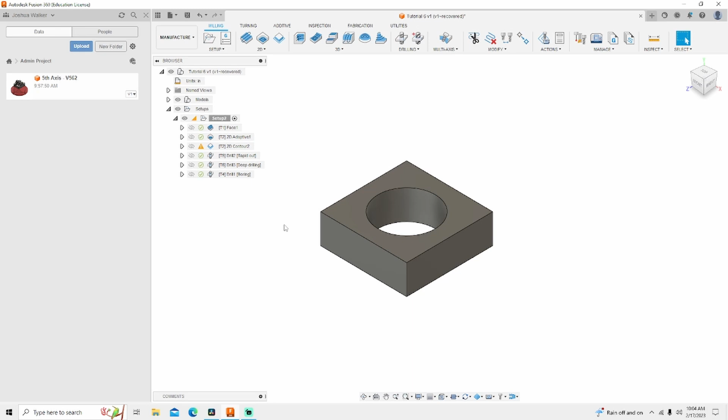First thing we need to do is figure out how big our stock actually is. If you don't know and you're working on somebody else's drawing, you can right click on the setup, go to edit, work your way over to stock, and you see this stock is 3.1 by 3.1 by 1.35. And they have elected to leave 10 thousandths on top of the stock.

Now, I know from personal experience, this is not a correct stock size. You're not going to call the material supplier and say, hey, I need 3.1 inches of stock. They're going to say, we don't have that. A nominal stock size would be 3.25 inches all the way around. And again, 1.35 inches is not a standard stock size.

So we're also going to change that as well, to 1.25. A 10 thousandths face pass is okay, but I'm going to change it to 20. That's what I prefer. And again, this is done by model position Z+. That's going to give us our 20 thousandths.

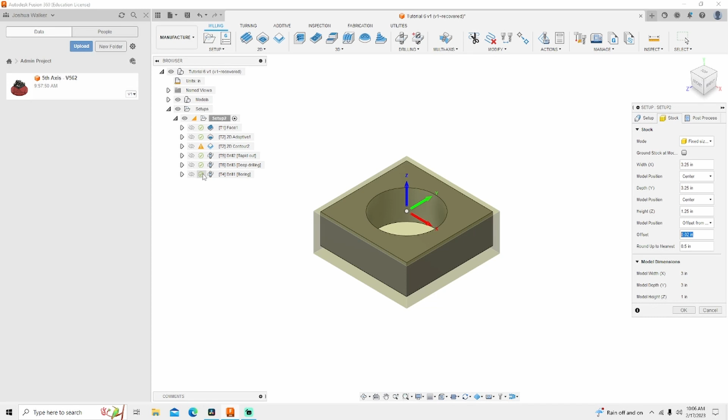Now I want you to see when I click OK, these check marks are going to turn orange because we have changed the model. There's nothing wrong with this. We didn't add enough material to really hurt anything. So we're going to right click and we're going to regenerate.

I wish it said regenerate rather than generate, but this is Fusion's terminology. Once you click generate, it's going to walk back through all the processes. This process right here, you'll see there's a yellow triangle. It's telling you safe distance is higher than the feed height. That's fine. Then it's going to tell you toolpath safe distance is higher than the feed height. Again, that's fine, it's not going to hurt anything.

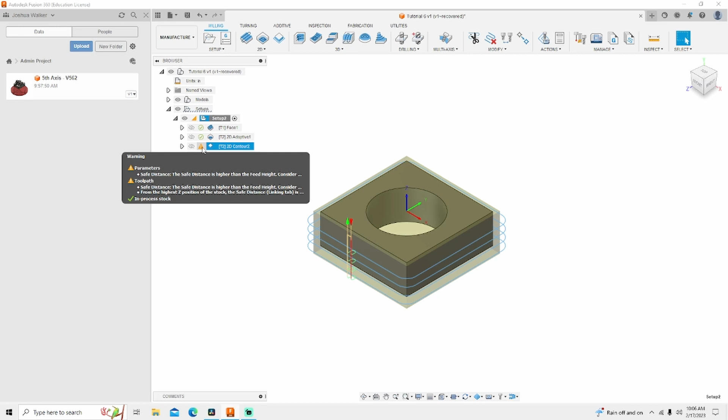Next thing we do is we need to actually model this, because once you go back into design, your material goes away. The way I like to do this is just create a sketch right on top of the part. This part is pretty simple, it's just a square, so we'll create a square.

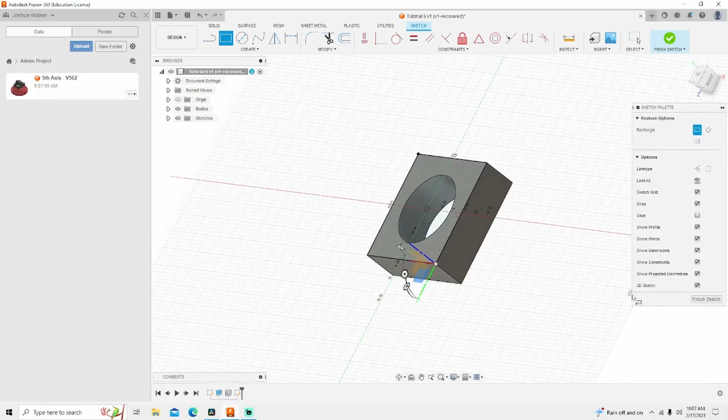Here's our 2-point rectangle, corner to corner. Rotate this around, click on Finish Sketch. Once we've done that, we can extrude a part. Click on that surface, make sure you click on both features. See how one selects the face, the other one selects the whole area.

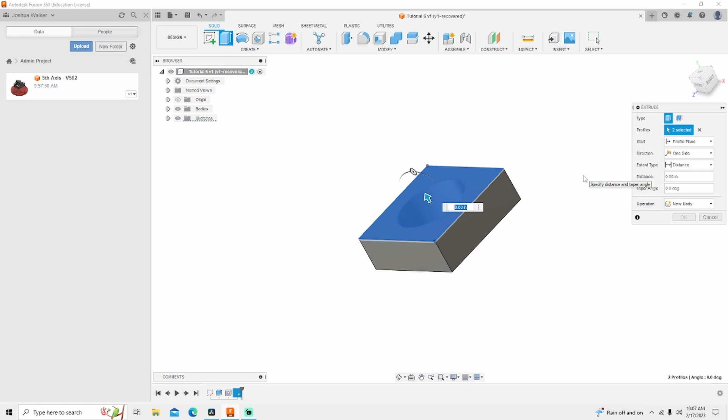Now, keep in mind, we've got 20 thousandths worth of material on top of the part, so we need to extrude in two different directions. We need to extrude up 0.02, and we need to extrude down 1.25 minus 0.02. I could have done the math, but honestly and truly, I'm just lazy, and I'm going to let this box do the work for me. Anything you type into this box is a fully functioning calculator.

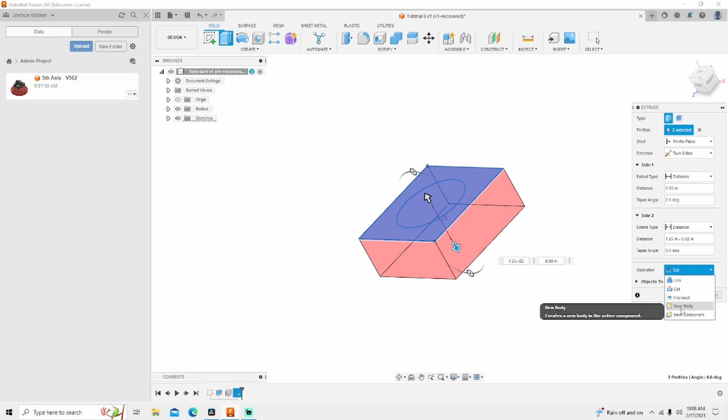Once we've done that, we'll go to our operations. We don't want to cut it, because it's going to make our model completely go away. We want to create a new body. This new body represents our stock. So we click on New Body, you see the body's there, and we can now click OK. And now we know the exact size of our stock that we're dealing with.

Except one thing, I made the square to the size of the part, not the size of our stock. I did the correct height size, I did not do the correct width size. This is somewhat intentional, to show you how to make this option change.

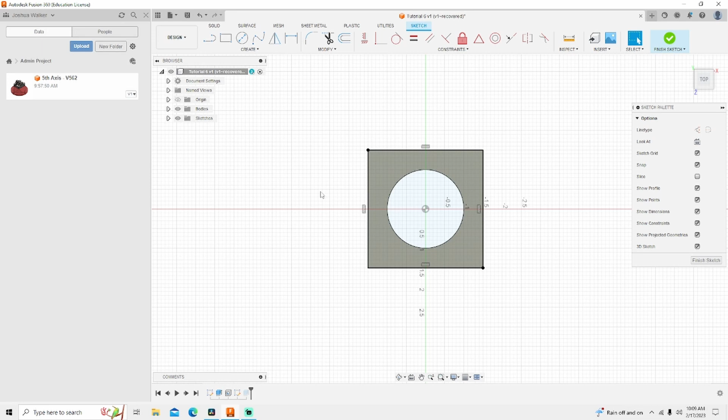So go back to your sketch down here at the bottom by right clicking, edit sketch. Now we know the material is a quarter inch bigger. We can go up here to offset, click on our rectangle, and we can change this to be a quarter inch bigger, minus 125.

Now I'm doing 125 thousandths, and it's negative because it's pushing it to the outside. I'm doing 125 thousandths because that's on all four sides. 125 plus 125 equals the 250 that we added for material.

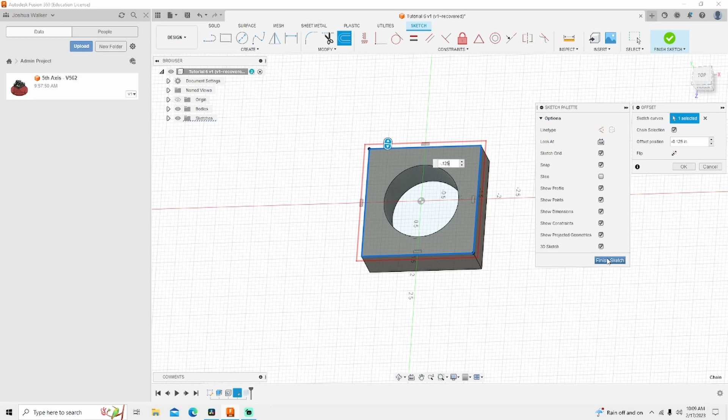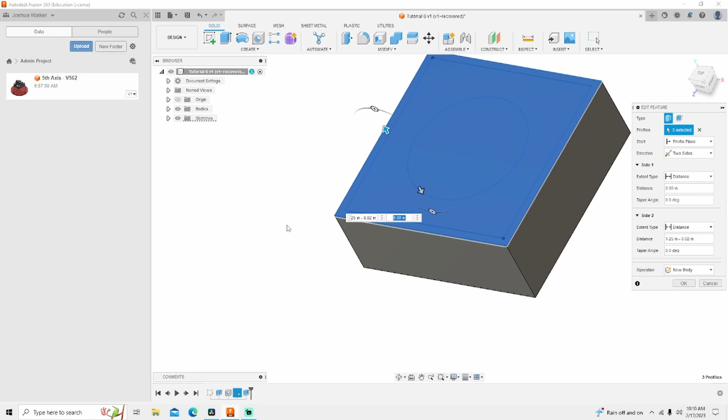We can now click Finish Sketch, and right click on Extrude, edit that feature, and we can add that feature to it by clicking the empty rectangle. Again, this is what it will come up like. I just have to click the outside rectangle area, and all of a sudden I've got a fixed stock. Now we can click OK. This is our true stock size with our part inside of it.

We can now work on importing our vise. Now, when it comes to importing vises and fixtures and fourth axis and all this stuff into your machine, it's relatively easy. Only thing you got to do is get a hold of a manufacturer's STL file or whatever flavor they're using for a file extension for their solid modeling and import it into Fusion.

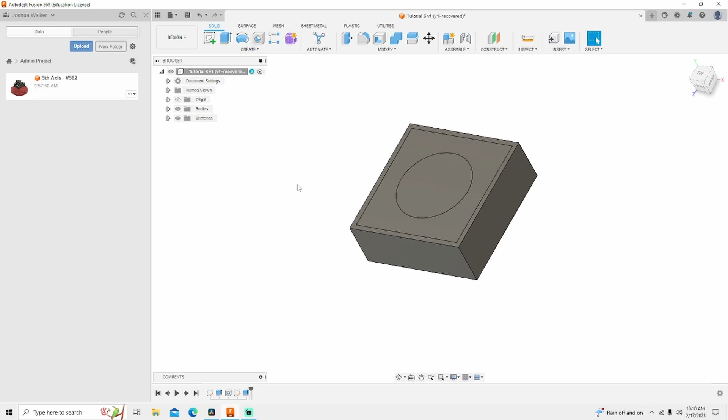Now today I'm going to be using 5th Axis's V562. This is a very common vise that has been on the market for quite some time, and a lot of companies really love this vise for a lot of different reasons.

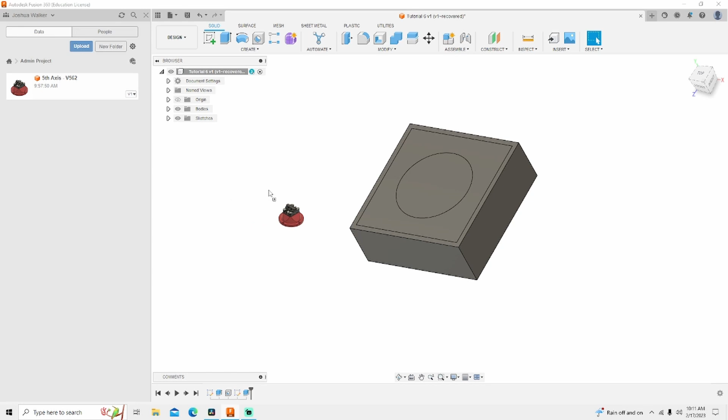To use this vise, we left click and hold. You should see a red circle with that slash through it and a picture of the object. That red circle with the slash means I can't drop it here. But watch what happens when I slide over. I can drop it into my model. You let go of your left click and it's in there.

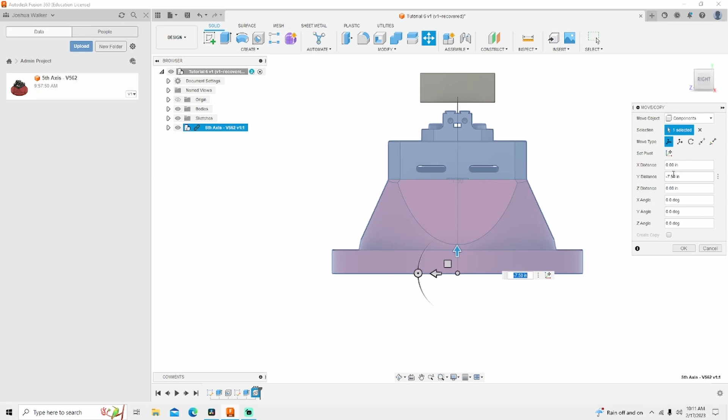At this point, we need to position our vise into the correct location. That's what these arrows are for. You can click them and pull them down, or you could actually go over here and type in true position. So let's do -7 inches. That's pretty close. So we want to make some small adjustments from here.

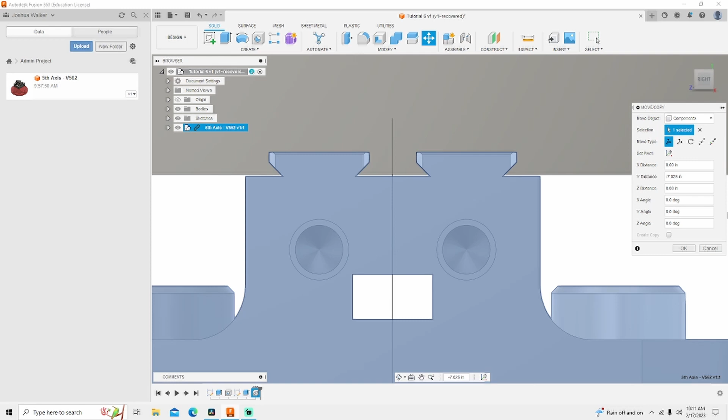7.1, too much. What about 50 thousandths? It's also too much. 25 thousandths, again, too much. 20, almost there, but I want you to notice this small little gap. That does matter. 15 thousandths puts us pretty much dead on. If you can't see, just zoom in.

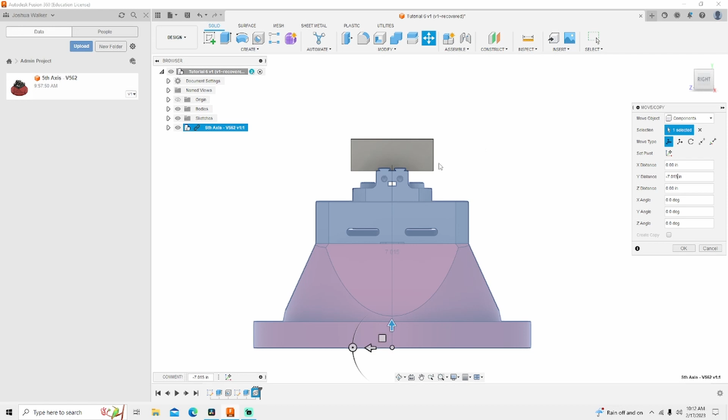Simple as that. Make sure your part is in the correct position top to bottom, which basically means put your material on the bottom of the vise jaws. Once you've done that, you can simply click OK.

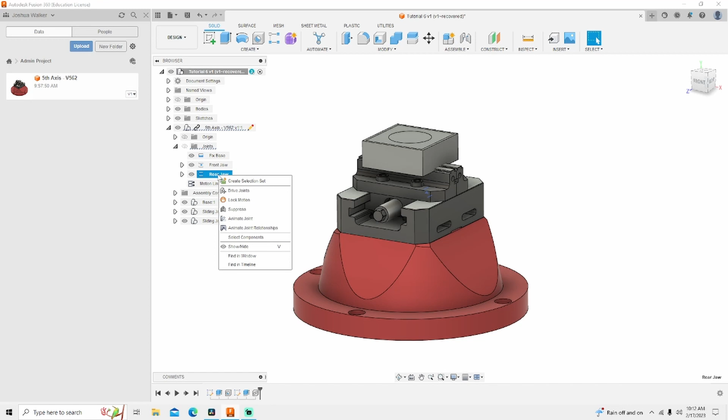At this point, the only thing we have left is to open these jaws to where it's actually holding the material. If you look where your model actually is at, you down click on the arrow, you down click on joints, and I've used this vise quite a lot, so I know the rear jaw, if I right click and drive joints, will drive both sets of jaws at one time.

Now this vise can be operated two ways. You can operate this vise from the internal or external depending on what you're doing. So we're going to get close, and then we're going to start changing our numbers so we can get more exact.

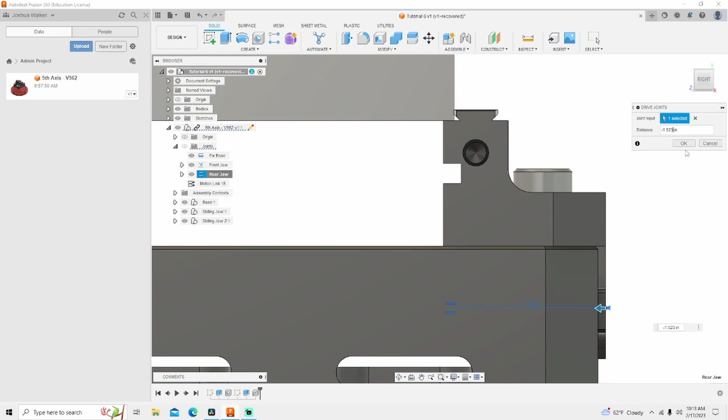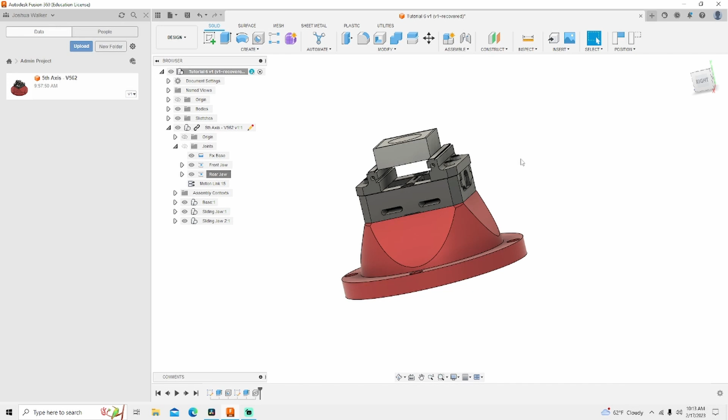In my instance, it came in at 1.523 is how much the jaw needed to move. Now we've got our part with its stock in the vise. We can click OK. Now we are in the actual position we will be machining in. Once you get this done, you can go back to manufacture by clicking on design at the top, and now you can see the stock, the part, and the vise riser.

Now we no longer need the actual model of the stock. So beside models, we can click down, then we see tutorial 6, click down on that, and then you see this big tile. Now we obviously don't need all this. So we go to bodies, because remember, when we created that stock, we created a body, not a model.

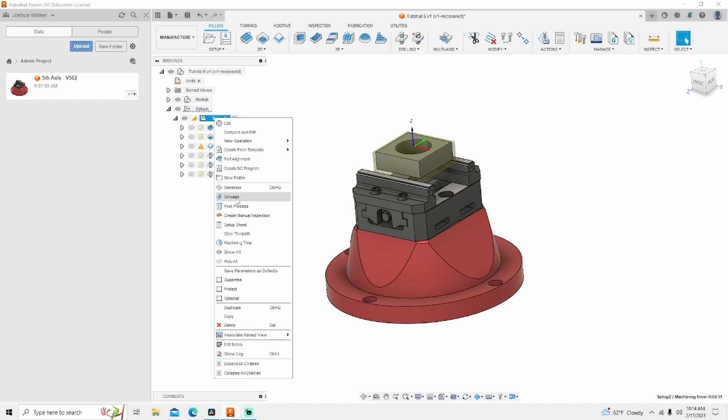Body 2, body 1 is your actual part, body 2 is the one we created. We can hide that for the machining process. Now once that's done, we can close that arrow, right click on setup, and simulate it again. And it will show us our part being machined all the way through. Again, this is a very simple part, nothing complicated here.

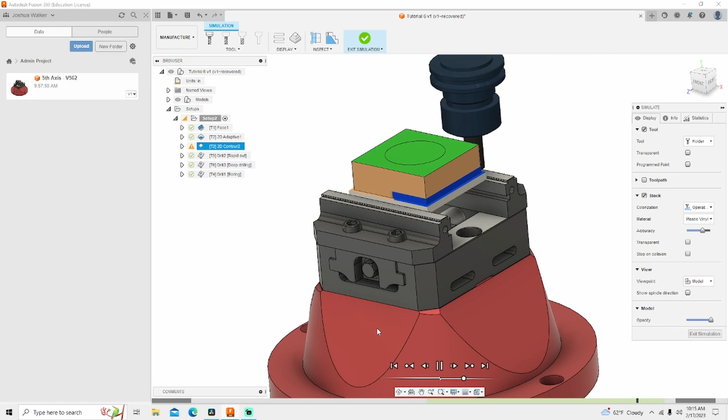The only thing you're watching is to make sure you've got proper clearance. If you've got this modeled correctly, in the actual place it's going to be, you can actually see what the part will look like inside the actual vise. Once we verify and validate that this is going to work, we click exit simulation, and then we need to add a machine.

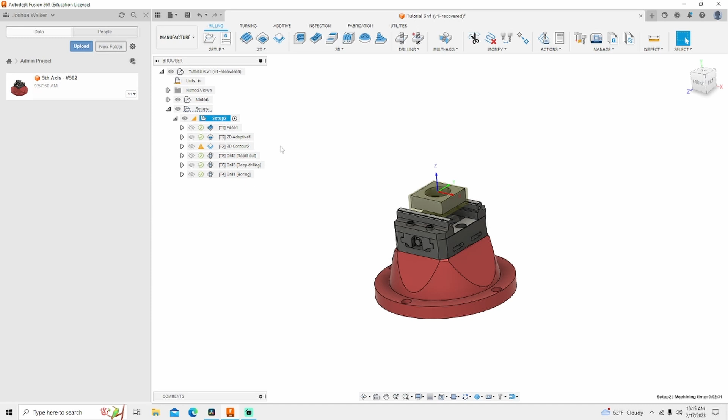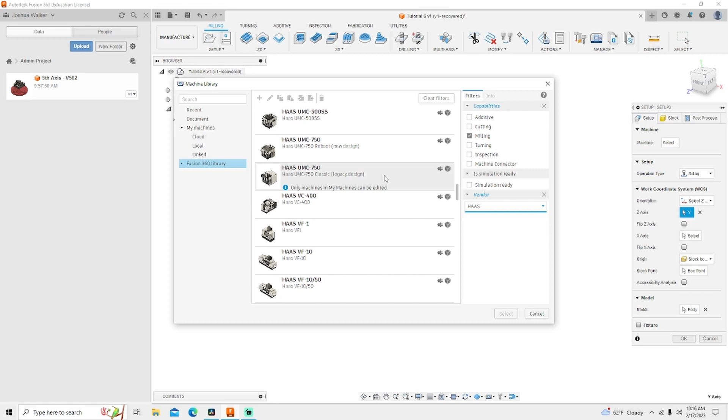Very simple. Right click on setup, edit. You see this tab under machine, we mash select. We go to the Fusion 360 library. I'm going to use a Haas brand machine, and I am going to use a UMC 750. I'm going to use the legacy design because I actually like the older design of the machine versus the newer design, plus you can see better inside this model. Click on the model, click select.

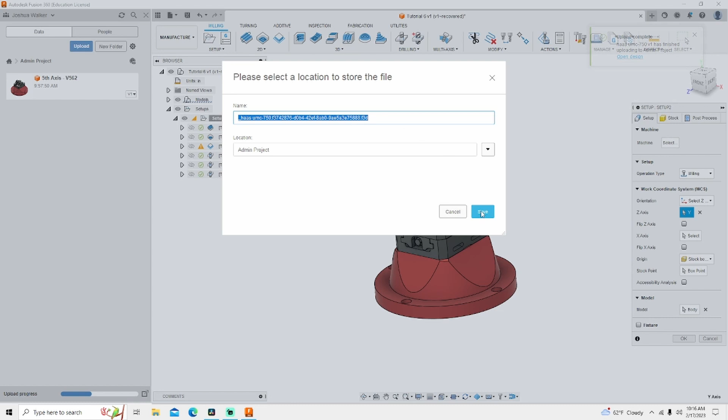It's going to ask you to download the model. You're going to download it in your folder of choice. You can put this model anywhere you want to. I'm going to put mine under Admin Project, same folder that my Vise is in. I'm going to select save. You're going to wait a few seconds because Fusion has to do all the modeling and has to do all the uploading and stuff. Once that's done, it's going to give you another file name. Again, you need to save it as well. That's basically a unique extension to that model for your folder.

Would you like to download the machine connector? I don't, so I always click no. It doesn't bother the machine, it doesn't hurt anything. I honestly don't know what it does. I probably should research and find out what it does.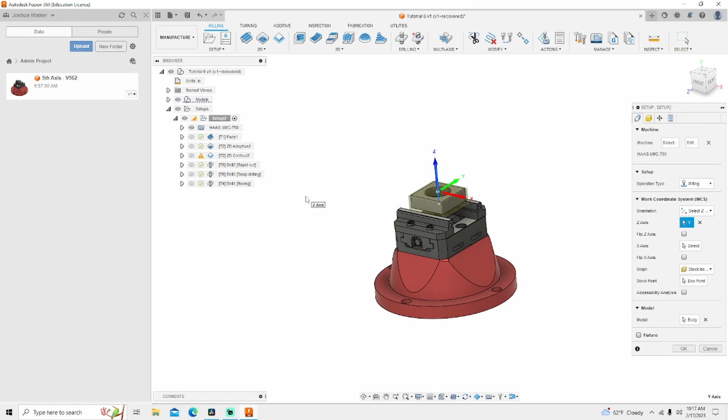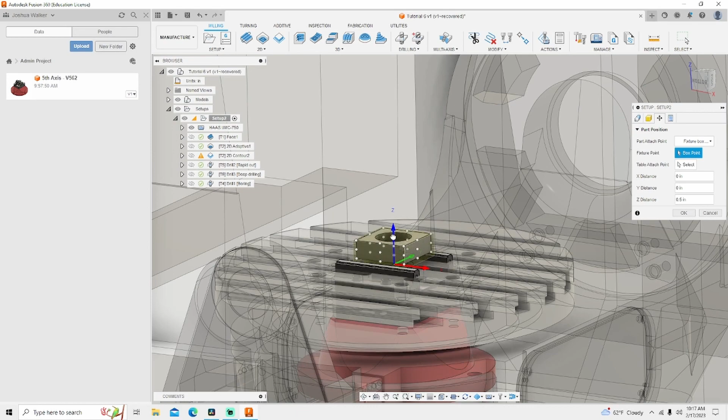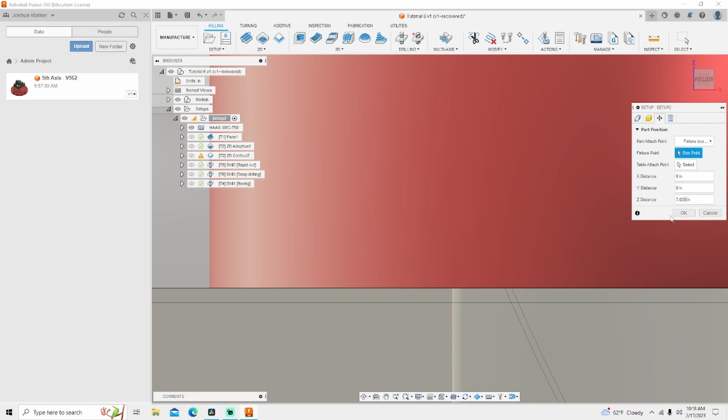So now that we have the machine in here, we can position it. Notice it says Haas UMC 750. Now you'll see the machine comes in a wireframe style design. Now some people complain that it's hard to see, and I kind of agree with them. Same thing as we did in modeling, you grab your arrows and you pull up and down, and it just happened to be that this one is really close already, but I can still see some of the red down inside that gray right there. I don't know if you can see that on your screen, but I can on mine. So we will start changing this by very small measurements. 25 thousandths seem to have done it.

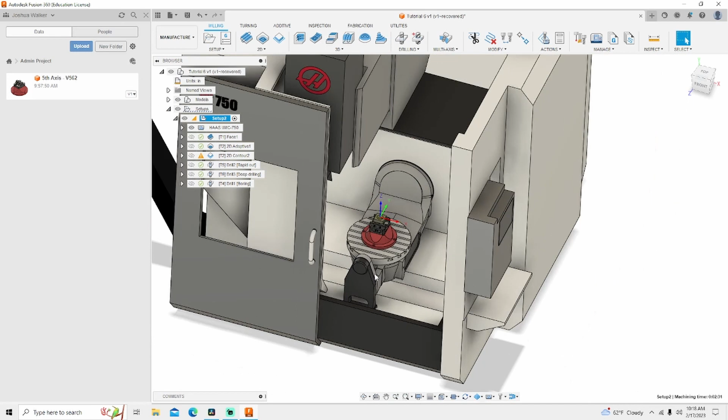And now our model is inside of our machine. We mash OK. The only thing else you would have to check is to make sure the bolt holes would line up with the actual T-slots of the table. But because everything is being made on center here, it all lines up in my case. But if not, you would shift it left and right and back and forth, X and Y, to be able to line it up exactly where you want to.

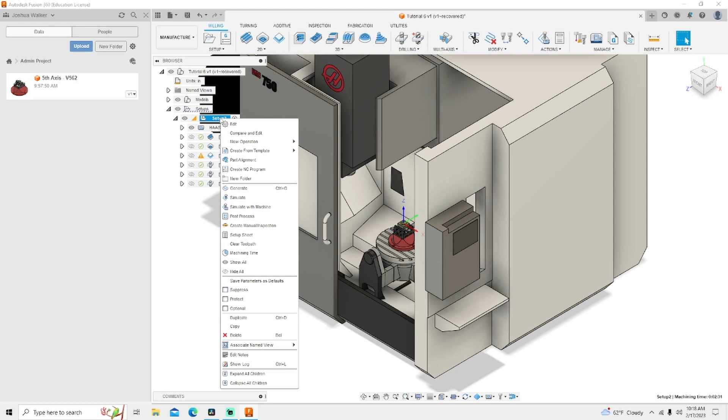Now that we've got this done, we can go back to a normal view. You'll also see down here under your setup, you have a Haas UMC 750. You can right click on setup and now simulate with machine. This is going to actually simulate the part being run with the spindle of the machine.

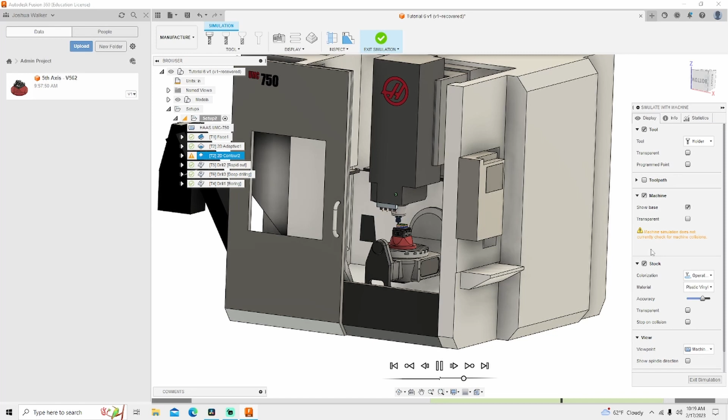Again, Fusion does not do crash detection. It's going to tell you that over here. Machine simulations does not currently check for machine collisions. It won't. This is up to you as an operator. If you want to buy software that does machine collisions, you're more than welcome to, but it's not going to be at the same price that Fusion 360 is at. So now that we have verified everything looks great.